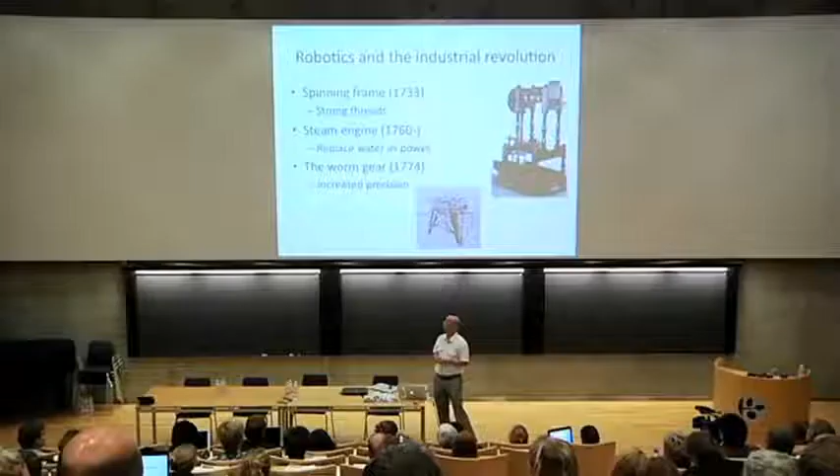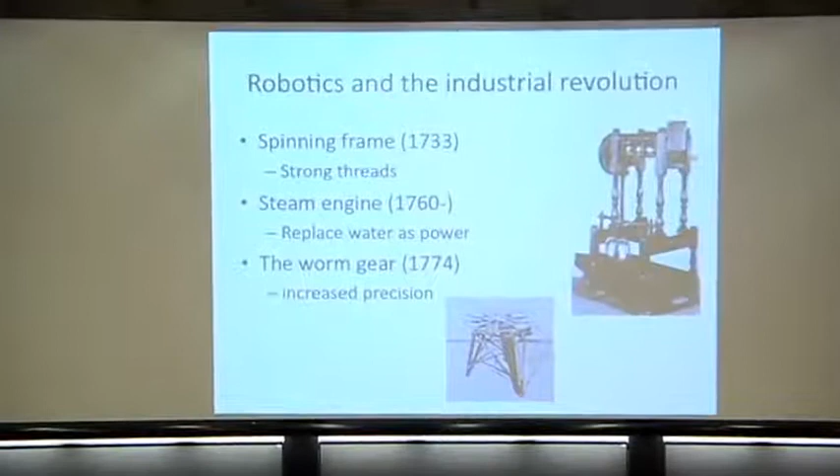If you think about robot technology, it really came out of the Industrial Revolution. Some of the first things that enabled it were great inventions like the spinning frame, which made it possible to make much stronger threads in 1733. There was the steam engine in 1760, which replaced water as power. Before this, you had to put your factory right next to a river, otherwise you couldn't power it. But the steam engine meant you could make factories anywhere, a huge breakthrough we don't think about today. There was also the worm gear, a mechanical piece that dramatically increased the precision of machines they could build back then. So these were some very early things that made the Industrial Revolution possible.

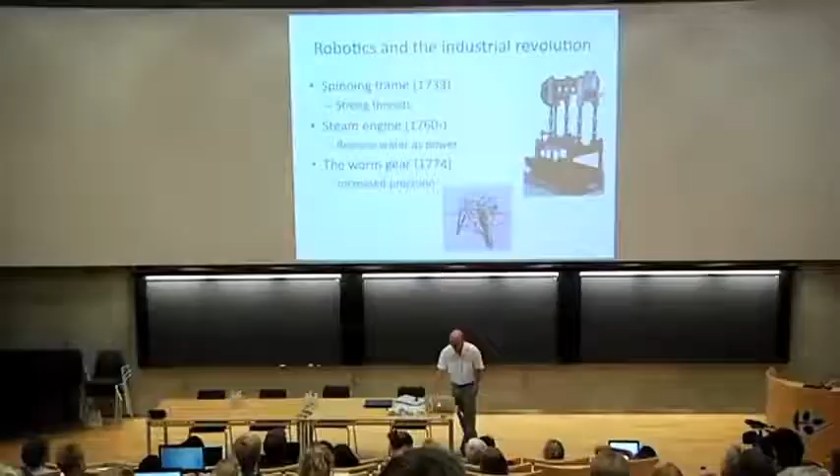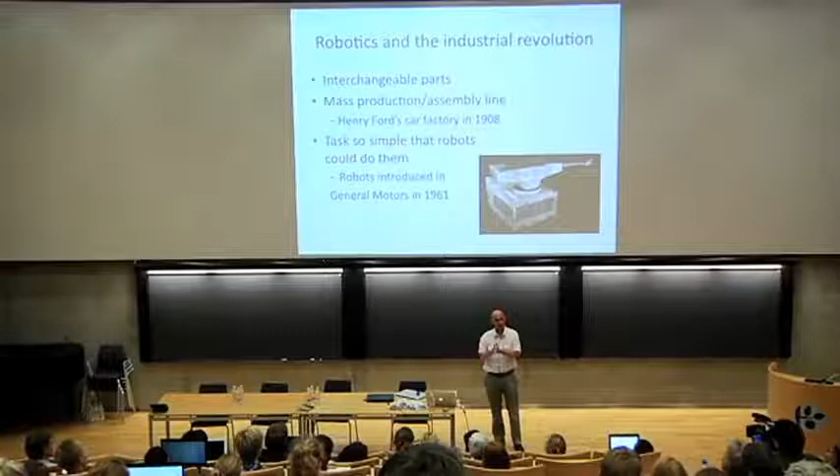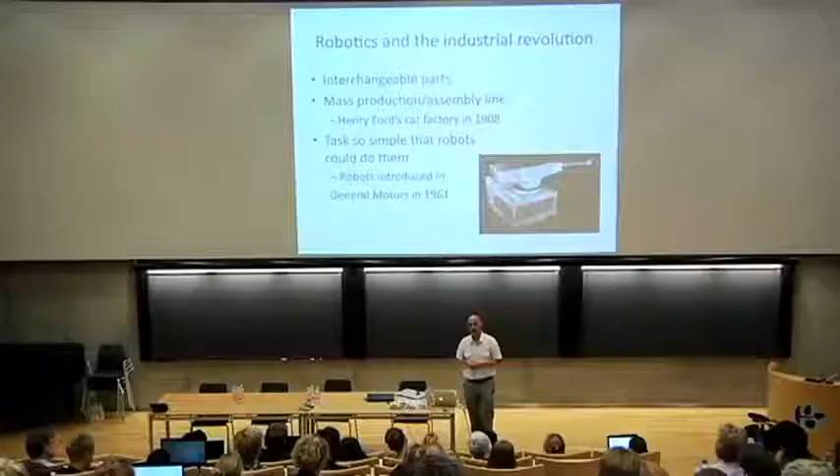If we move forward to today and look at factory automation, I believe we are reaching the end of automation. We've worked on this for 200 years and we're getting very good at automating production. One way of looking at this is using Danish kroner: today a robot typically costs around 300,000 kroner, but the cost to pay people to actually implement this robot in your production is about 1 million kroner. That's an indication of how complicated it really is—if it was cheap to put a robot out there, it would cost 30,000 kroner, but it's so complicated it requires a whole team of engineers. That's an indication we're reaching the end of what's possible to automate. Of course there's still more, but it's slowing down a little bit.

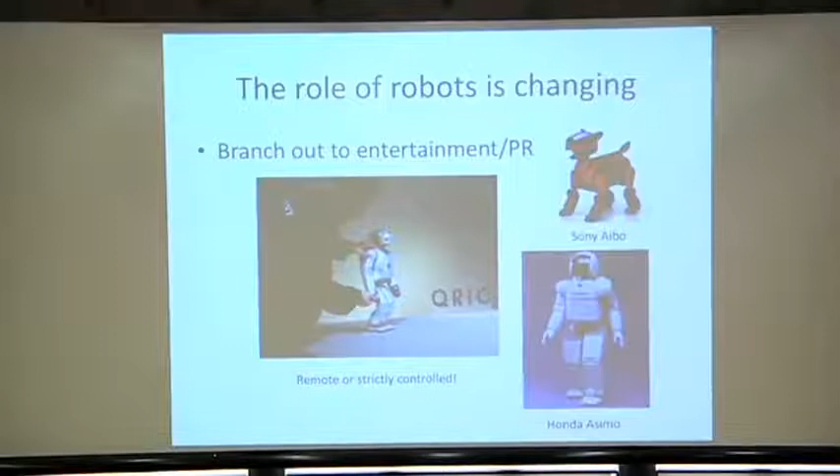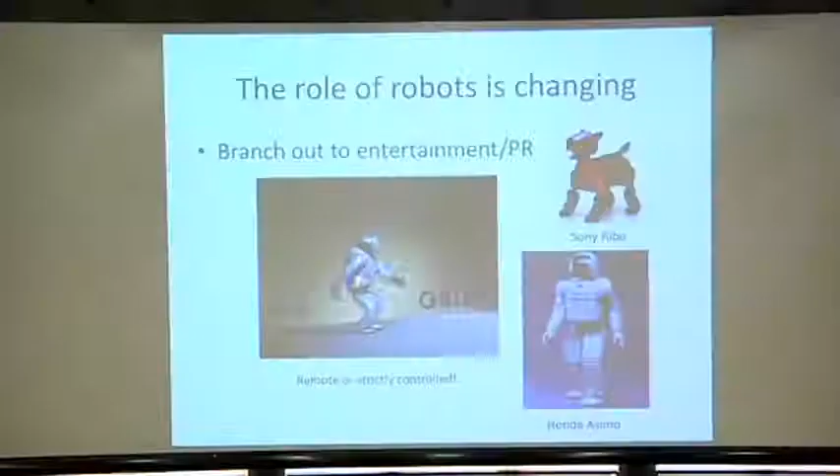So this is where robots came from. But now we're seeing a whole new set of robots that have appeared within just the last 10 years or so. Here is Sony's QRIO robot, an example of a humanoid robot. It's completely changing—it's not a stupid machine standing in a factory isolated from the world. It's starting to become something we can engage with. However, they're still machines, still related to industrial machines, so it's not like this guy will run around and take over the world. They can still only do the very simple tasks we've programmed them to do. Even though it's a mechanical masterpiece, the brain is in many ways empty.

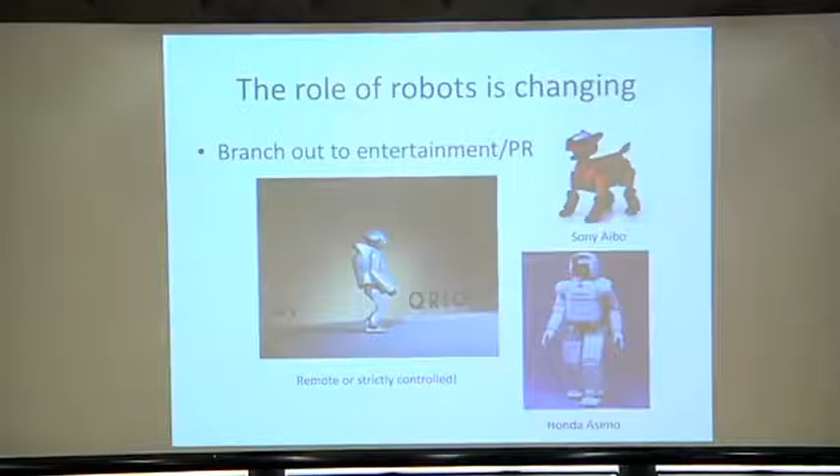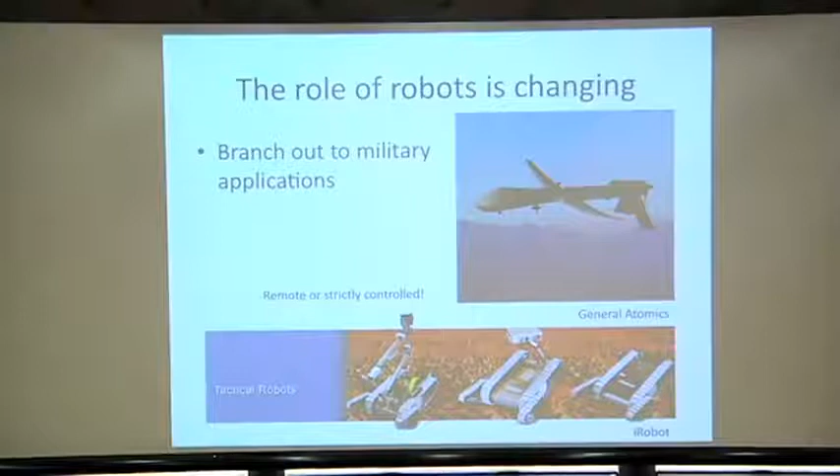If we move on, robotics is also changing in a not so encouraging way—here we have military applications. Again moving out of the factory, they look like impressive machines, but again the inside is relatively empty. For instance, our drones up there can fly around autonomously and do surveillance, but they don't think by themselves—there's a human operator at the other end pressing the button if you need to fire a missile or take a picture. The same goes with the robots at the bottom; they're nicer in the sense that they're used for minesweeping, but still there's a human operator remote controlling them. So they're moving out of the factory, but maintaining the stupidity of the factory robots in many ways.

What's possible for this one is that it has a recharging station, so it can start from there, run around, vacuum clean a room, and once it runs out of battery, or when it's done with the job, it can go back to the recharging station and be ready for the next day. This is a robot that has its own life and can do something insect-intelligent-like in your house, so maybe you don't have to worry so much about cleaning. This is a whole new dimension for robots—they can do stuff by themselves on their own initiative.

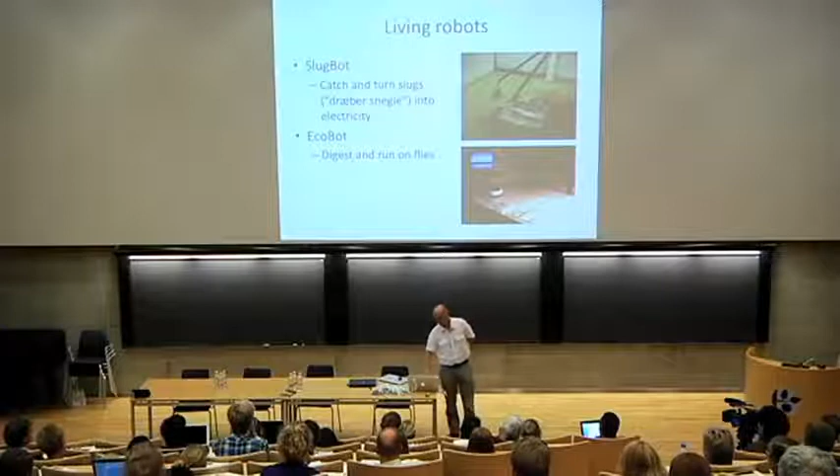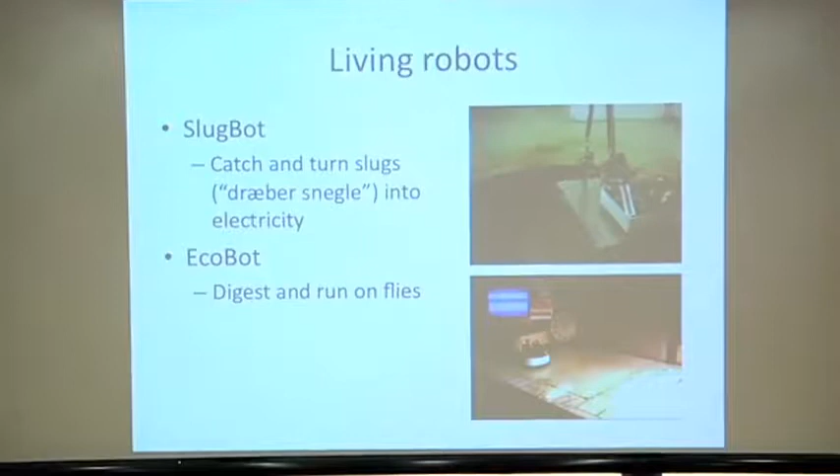If we take that one step further, some of my colleagues from the University of West of England have made this very nice robot, and also this one below. What's interesting is that it doesn't depend on power from the power plugs. In fact, the first one can catch slugs—dræber snegle—and put them into a microbial soup on the back that converts the slug into power, enabling the robot to run around and catch more slugs. So basically it's even more alive than the vacuum cleaner you saw before.

One important thing to say is that a slug doesn't actually generate enough energy for the robot to have enough power to catch another slug. So the energy balance doesn't really work out in this case, but development is going in this direction. The robot at the bottom ran for about 7 hours on 7 flies, but it didn't go very far. Still, this technology is being developed as we speak.

So robots today have a kind of limited self-sustainability—we can recharge them, and maybe in the future they can eat from our lawns while doing the lawn mowing, so we don't have to give them power. They also have this limited sense of autonomy. They can do some things on their own, but vacuum cleaners tend to get stuck on dirty socks and wires, so there's still limited autonomy in these systems.

So robots in the future, I think, will develop, and we'll see increased self-sustainability and autonomy. But we will also see some of the other characteristics of living systems, like self-reproduction and the ability to evolve.

Maybe—so we can of course not make robots directly from the environment. Robots today are typically made from metals, computer chips, and so on. But we can imagine a situation where we have robotic cells lying around in the environment, maybe in a special cupboard in your house. Then once you want to construct a robot, you take these cells out and they form the robot you need right now.